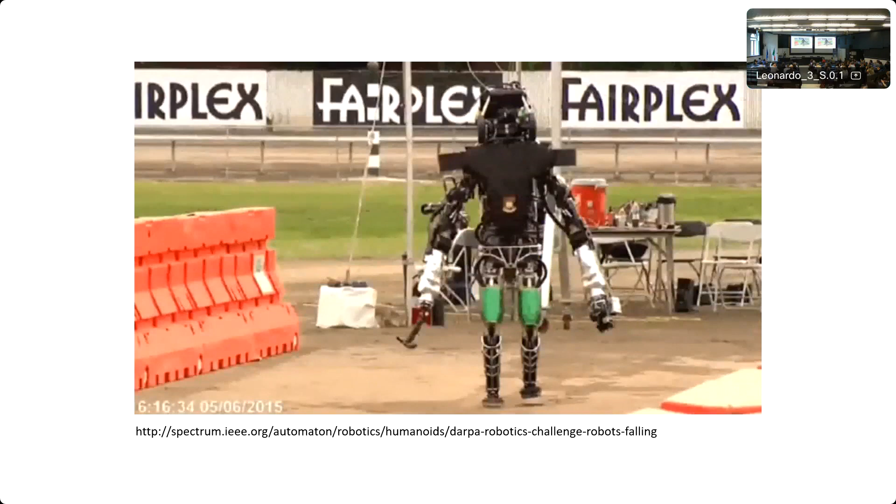But before then, I'm here, I feel like I'm representing robotics, so I must show you some videos, all right? Let me start with this. How many of you know about the DARPA Robotics Challenge? Very few, okay, not as expected. So in 2015, well the finals were in 2015, DARPA, which is a funding agency in the US, they tend to run these challenges. The most famous one would have been the DARPA Urban Challenge, which really started the autonomous vehicles boom, that was in 2008-ish. And what they did after the Fukushima reactor disaster, they came up with a new challenge: can we have a robot perform different tasks in the context of disaster relief?

So they came up with this competition that had the robot do 8 tasks: walking over sand, getting out of a vehicle, opening a door, turning a valve, picking up a drill, walking over uneven terrain, walking up steps, and I think I may have missed something, but maybe not.

So those are the competitions. There was a final event, and I was involved with one of the teams at the time. This is a compilation done by IEEE of the first day, where they compiled a whole bunch of failures. I want to show you the failures and highlight a few things to give you an idea of what we're dealing with in robotics. This is from 2015, so things have evolved since then, but the categories of failures are very similar.

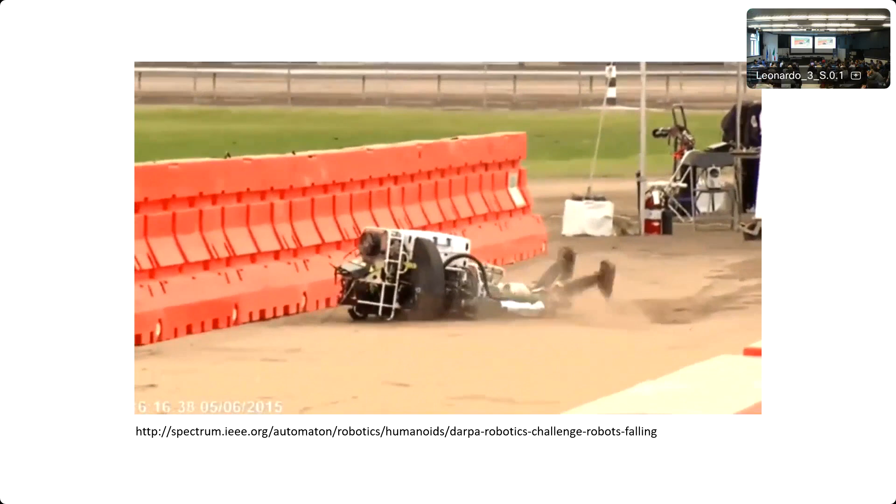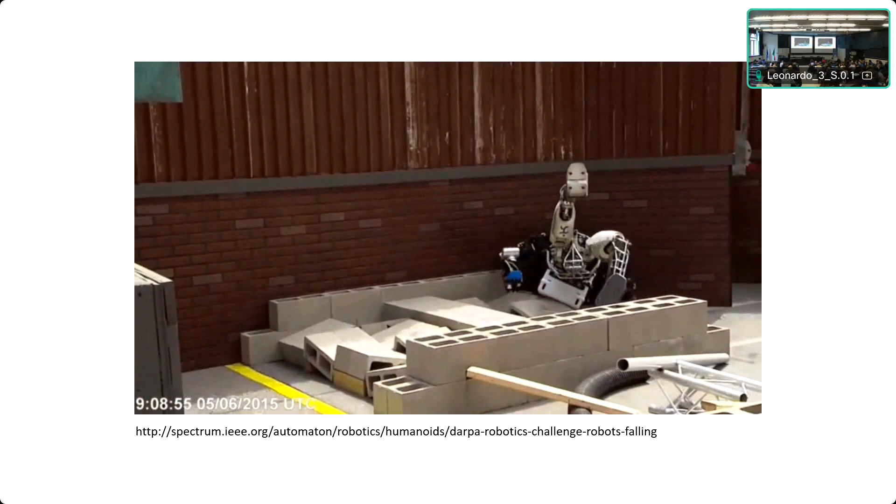So we started with walking. There are notions of stability, and notions around opening a door - maybe you opened it and maybe you didn't quite. You'll see a lot of robots falling because these are big, heavy machines that need to stabilize, and DARPA was really into humanoids at the time. So there's a bunch of things happening - walking on sand is difficult. Of course, a few people did very, very well, not my team.

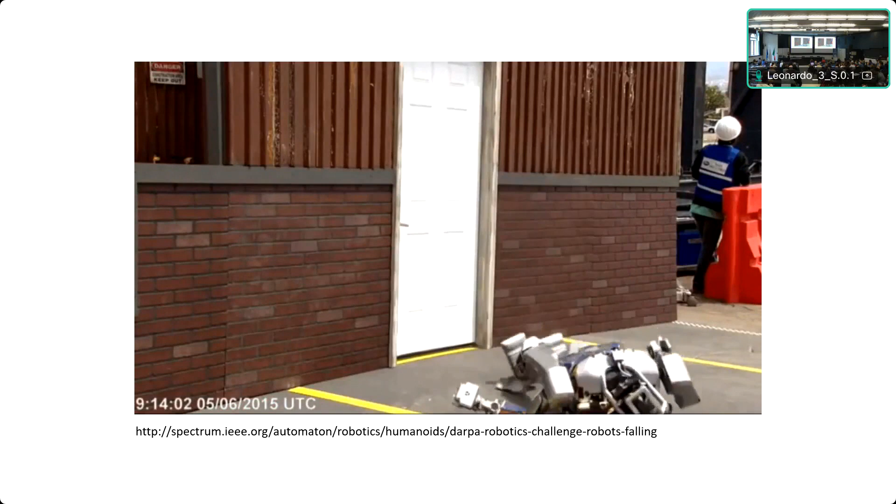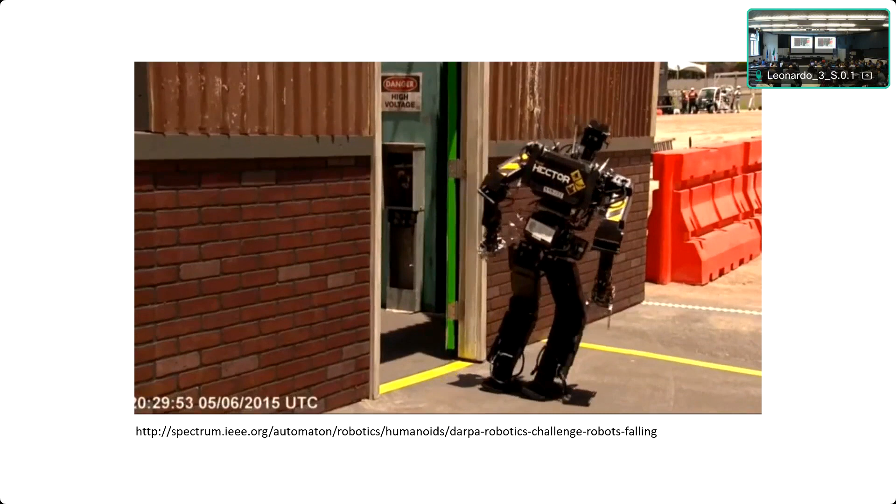Walking up steps, again, stability, heavy - center of mass and all that. But in this case there was actually a sensor failure. So it wasn't the controls, but the sensor was giving wrong information. There's some things falling.

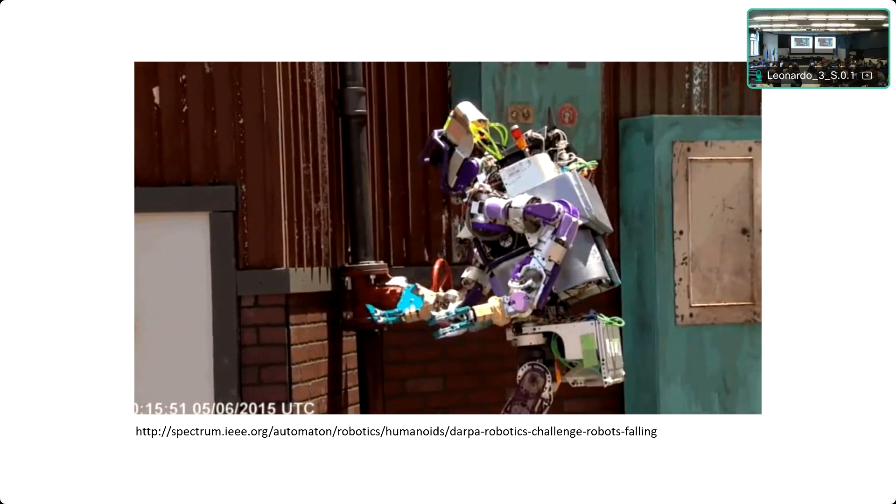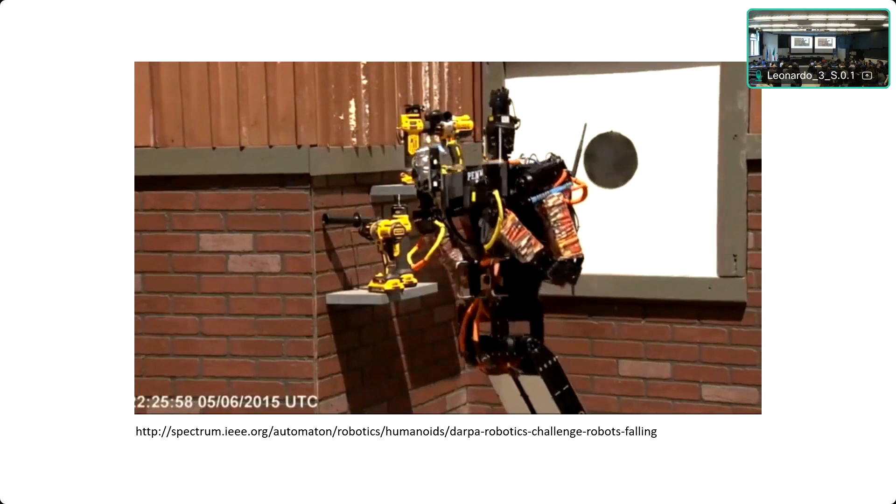This one I really like - it's trying to turn the valve. It's grasping, not the valve, and then it's turning it. Had it grasped the valve, it would have been totally fine. There's a whole bunch of other ones, things falling on them.

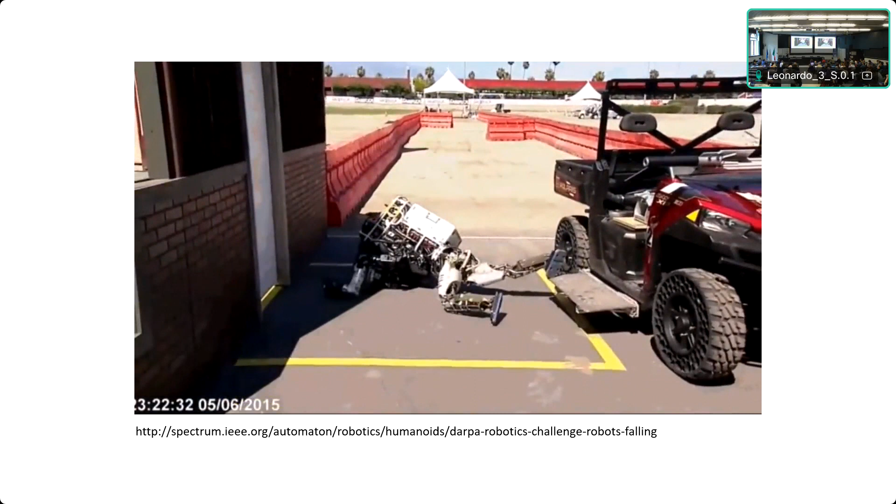This is a really nice one, I really like this one. This was human error - the mode switching was not correct. There are different modes, and what happened is, well, it doesn't really matter what was happening, but there was a mode switch done incorrectly, human error, which caused the robot to fall.

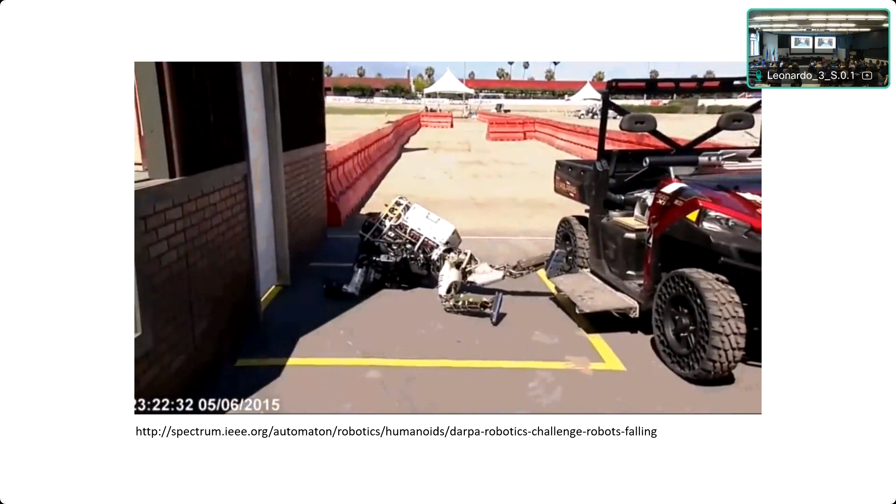But interestingly enough, this is the MIT robot, and two things were really fabulous about it. First, the task was to have the robot leave the car and step out into the yellow box, and they did get the point because the robot is fully in the yellow box. The other thing, which I think is even more amazing, is it broke the arm. All their testing, most of it, was done with the right arm for all the tasks - some tasks were bimanual, but most were unimanual.

Because of the algorithms they had - this was led by Russ Tedrake at MIT - they basically switched to the left arm and were able to complete the tasks. Well, they didn't complete the bimanual one, but they completed the rest, which was really amazing - the fact that they could switch so quickly.

So now you see, humanoids are complicated. Not all robots are humanoids - most robots are not humanoids, despite what you may see in the media these days. So what did we see here? We saw the environment - I thought I grasped the valve, I'm exerting force, I'm falling. There's stability, the control algorithms, and there's the environment - walking on sand is more difficult than walking on asphalt, and so on.

In addition, this is robots - you don't see any people. This is autonomous robots working in the real world with no people around them. What happens when you introduce people?

This is a fairly famous paper from the HRI conference, the Human Robot Interaction Conference, 2015. Researchers in Japan put a robot in a shopping mall and let it operate for a long deployment, letting people just interact with it. What you see here is kids giving the robot a really hard time - they're blocking it.

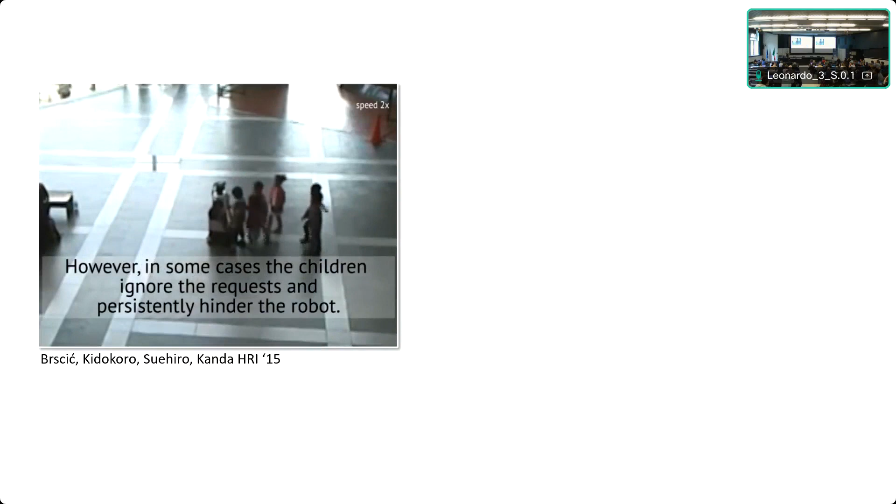They're kind of, at some point, they're kicking it. This is interaction in the wild with people, so this is robots around people, where people are not behaving well. This adds more challenges. But this is rather extreme—a good anecdote, but not typical.

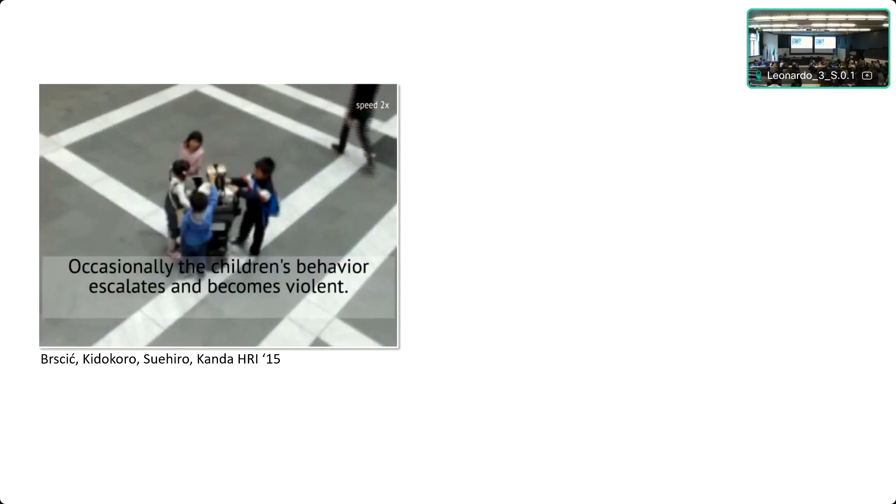What I think is more interesting is when you start putting robots to work with and around people. This is an example of work from my colleague at Cornell, Professor Bhattacharjee. He does a lot of work on assistive robotics. One example task is feeding—a robot arm with a fork going towards your face and putting the fork in your mouth. This is for people with motor impairments: spinal cord injuries, multiple sclerosis, cerebral palsy. You'll see examples of his system being deployed with actual users.

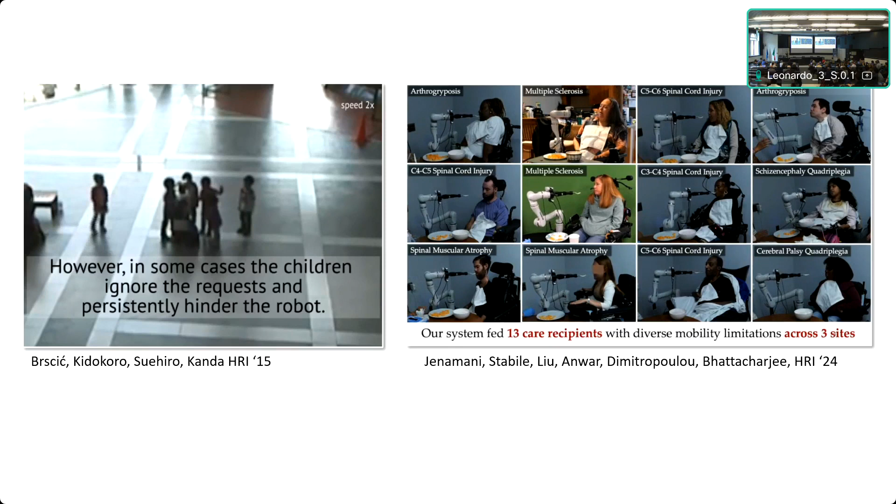So it's not adversarial. But the safety you need to show isn't just safety in the sense that you're not going to poke them in the eye, but also perceived safety. You have something coming towards your face—there are directions you want it to come, and a speed you want it to come. Even if it's guaranteed, verifiable, safe, if it's coming very quickly towards your face, you're going to flinch if you can. Not these people—some of them can't.

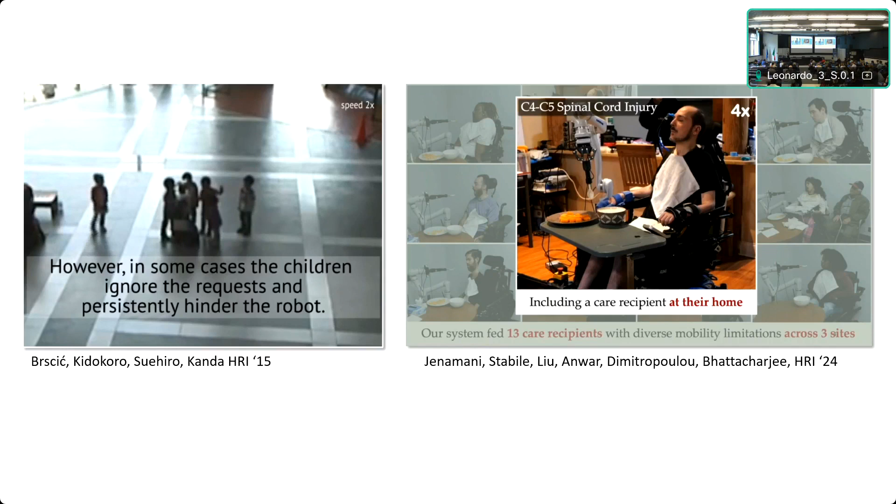This gives you an idea of the challenges with robotics and formal methods. We want to guarantee things, specify things, find beautiful mathematical formalisms to say things. But we have physical systems that are messy—different layers of code, from low-level controls to high-level behaviors. We have the environment, which may be unpredictable, and worse, I don't even know what the environment actually is, because this is all through perception, through my sensors.

Am I seeing you guys? Yes. Can I detect faces? Yes, as a person I can probably detect faces. If I put a robot here, does it recognize anything in the background? So there's the question of perception, errors, and uncertainties coming from the perception piece. And then there are people—and people, right? Yeah, say no more.

Going back to the definition of formal methods, I'd like to adjust it for my perspective—it's a very broad, concise, lovely definition. When you think about robotics, specifications require thinking about abstractions as well. I take this physical system—continuous systems with people, environment, and so on—and I need to abstract it somehow to say anything. What are these abstractions? Abstraction and specifications have to be together.

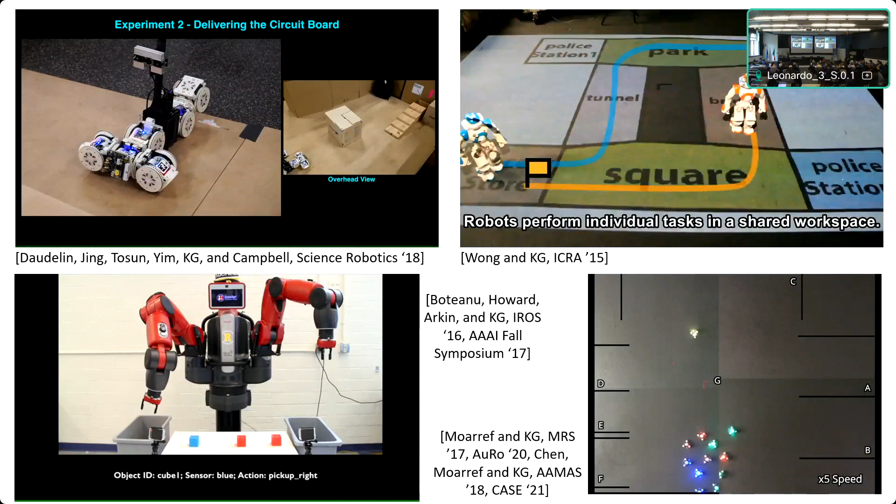These are a few systems that we synthesized over the years, all based on LTL, a lot of it with slugs, Rudiger's baby. Let me walk through them.

Top left are modular robots, built out of these modules. Each block has 4 degrees of freedom - 2 wheels, a pan so 3 rotational, and a hinge in the middle. On each face you can see half moons - those are electropermanent magnets you can turn on and off. This allows us to reconfigure the shape of the robot, and we can do this autonomously.

So our high-level behavior for modular robots had an abstraction of configurations and gaits - the shape, with a library of shapes, each with a few gaits or types of motion associated with it. We also had a perception system that abstracted the environment - stairs, a floor, and one more thing, a tall object.

We wrote specifications - let's see if it works - in this case, search for a pink tag. We simplified some of the perception for that, then drop something that's held by the magnet.

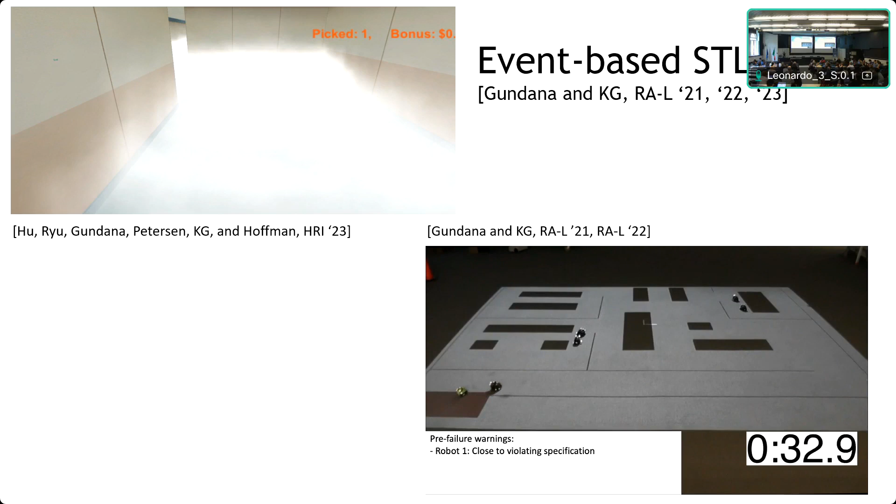You'll see a robot moving around the environment. I can't really watch it because I get motion sick, so if you get motion sickness, don't look at the top left. It's basically interacting with the person who's controlling this simulation. We had two different behaviors, and the way I sell it to my community is that to create those two different behaviors, the only difference was a few symbols in the specification. We basically synthesized this, synthesized that, and the difference was literally a few symbols. So we did that with a user study. We also did that with a multi-robot situation, which you can see—a few robots moving around. The green one, the bottom one, the lighter one, was controlled by my student. Just to show we can have multi-robot scenarios and so on. I'll come back to this to show a different point.

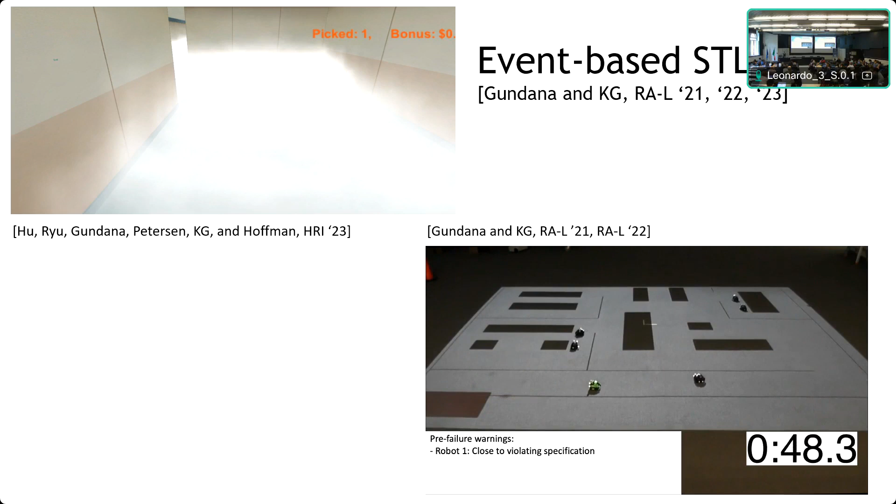The verification side, falsification, feedback, and repair - I want to give some examples of how we've been thinking about these things. I think this is very powerful, and people who used to focus on formal methods for robotics are starting to warm up to this a little bit.

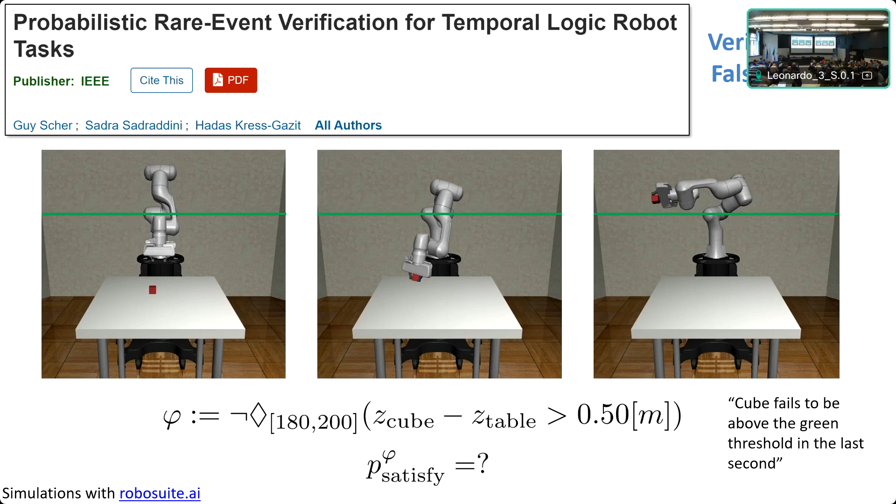What we did here, the uncertainty in this situation is the placement of the block on the table. So using reinforcement learning, we placed it a few times, gave it a reward function, and it was able to pick it up. Then we tried to see what happens with other locations on the table.

Now why is that? I don't know, it's a black box, RL, I don't know what happened. Are we always going to see this kind of separation? I'm guessing no, but it's kind of interesting to see, you can go back and simulate these things to show the system designer what's going on there, and maybe put additional examples and so on. So this is kind of from the falsification.

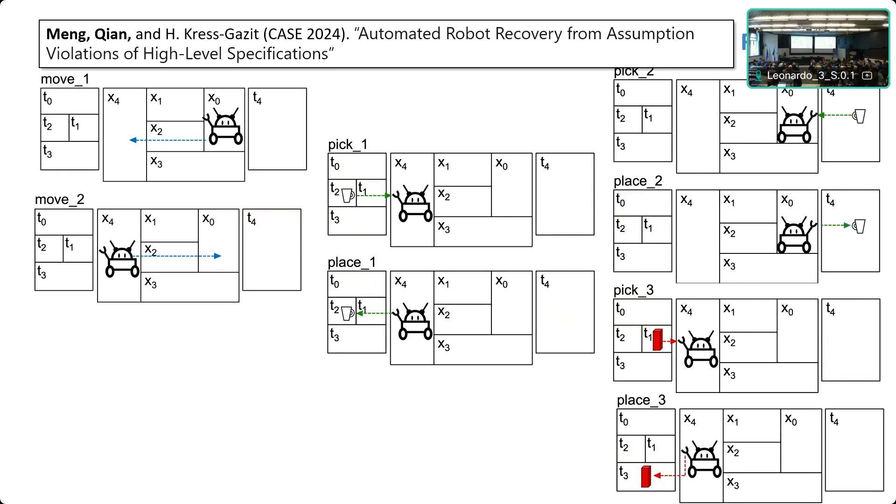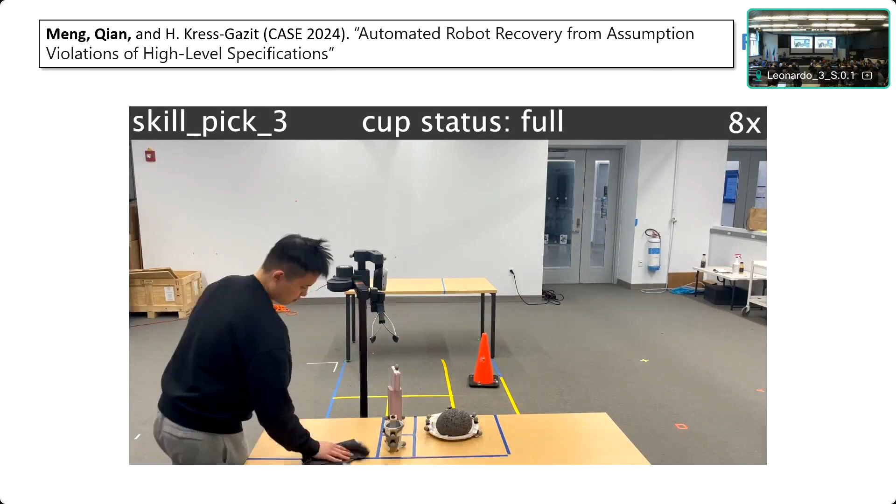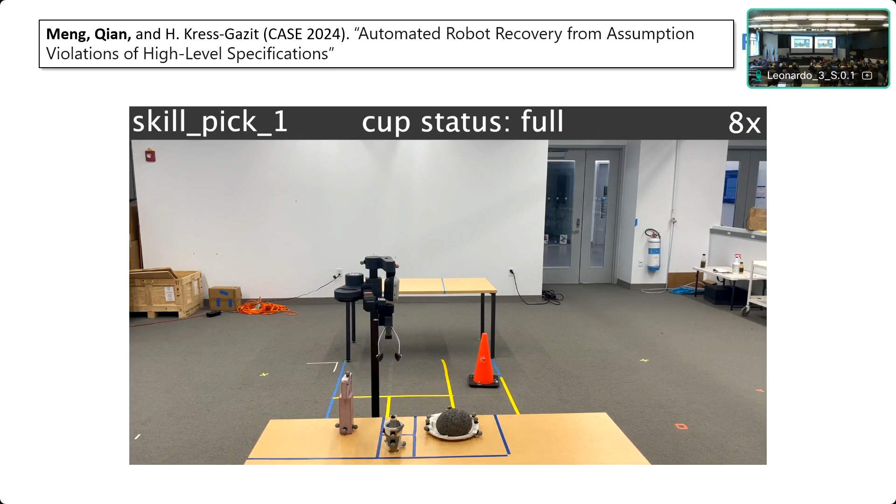In this context, we have a bunch of skills: the robot can move, pick up an item, drop an item, but it's making some assumptions. What you're going to see here is that these assumptions are violated. For example, it was supposed to move that pink object to the right, but now there's an object there, so it had to recreate a skill that puts it to the left.

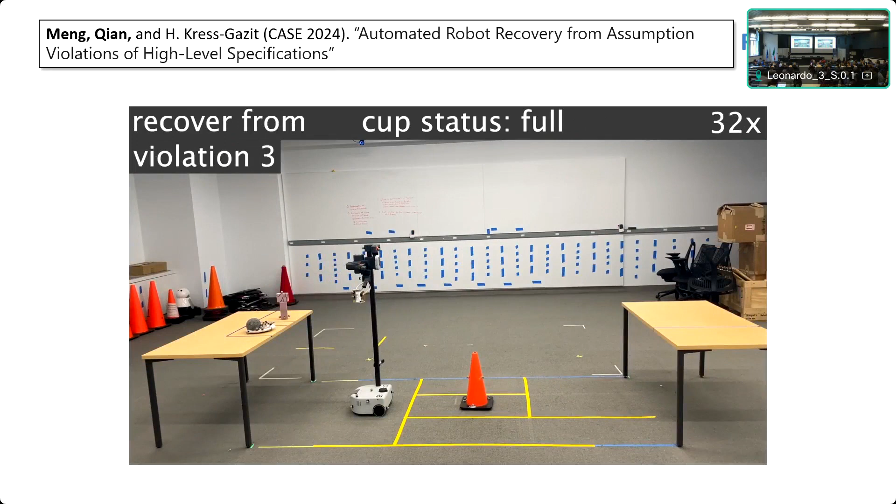Basically what we're looking at is 3 skill violations. I'm starting to execute a skill, and its preconditions, the assumptions it's making, get violated — that cone was not supposed to be there. So it's resynthesizing, creating a new skill that allows it to complete the task. The idea again is finding missing skills, both from the symbolic perspective to fix the task, and from the physical perspective to actually implement it.

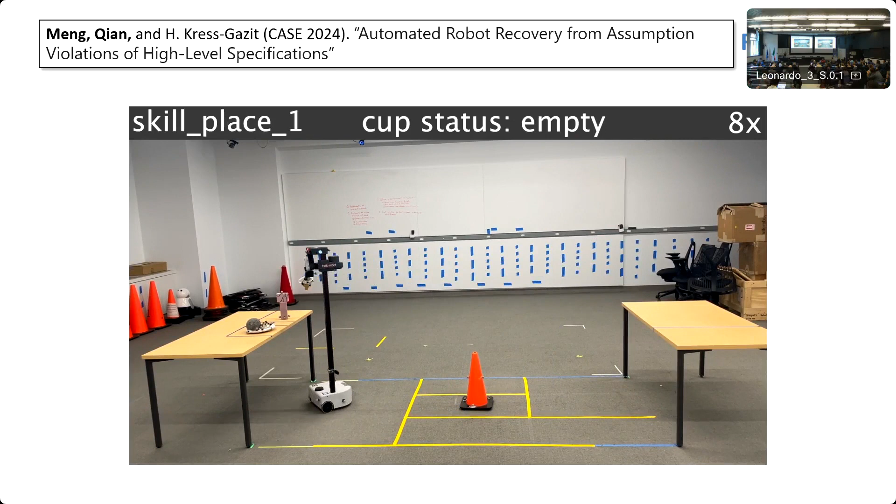This is kind of, I'll keep Hadas' definition of formal methods in the context of robotics — it doesn't fully capture it, but I just want to highlight a few things. I want to end with a few exciting directions in my mind, slightly biased. I'm going to talk about two things that are showing up now, and I had some of these conversations at this conference.

The first one is robot learning and formal methods. Marta gave a talk about verification of neural networks — you can think about verification of a neural network as its own question. Then there's the question of a system that has learning in it, be it perception or action, and how do I start thinking about verification? Can I do verification? Probably not, but falsification, synthesis, and all these questions on the full system — because I really care about the full system and what it can do.

So, as I mentioned, a few other plugs for the annual reviews. These are things that the community, from the robotics perspective, or even the hybrid systems community going and implementing these things in robotics - you'll see a lot of the word safety. Safety typically means you have a set of states that are unsafe, and can you guarantee it? So there's shielding, safety filter or safety shield. There's safe learning, so limiting the actions in an RL setting, reinforcement learning setting, and so on.

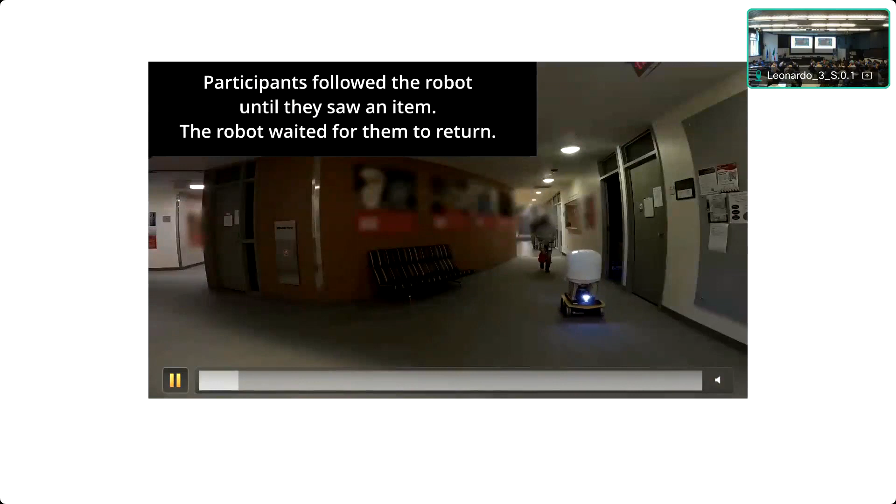So the robot is controlled using event-based STL, fully autonomous, and so on. We have two different behaviors. They're HRI questions, which I'm not going to go into. But what I do want to go into is something interesting.

Let's see if I can do that. Oh. It's not letting me skip ahead. Interesting. Oh. All right, I'm going to run this and yeah, I still have a few minutes.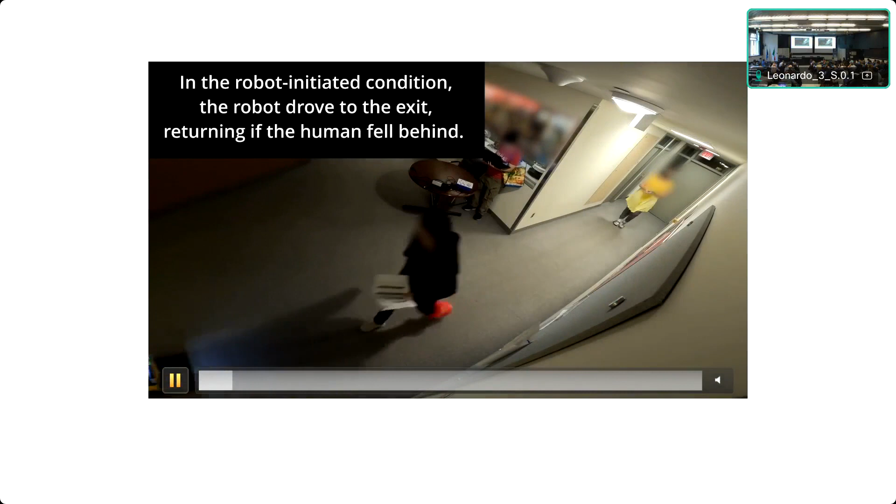So it's going to have two different behaviors. One of them, the robot is initiating an evacuation - it's trying to be proactive. The other behavior you'll see in a second is the robot following the person, who decides when to exit, and then they exit. It's a little more complicated than that, but that's the idea.

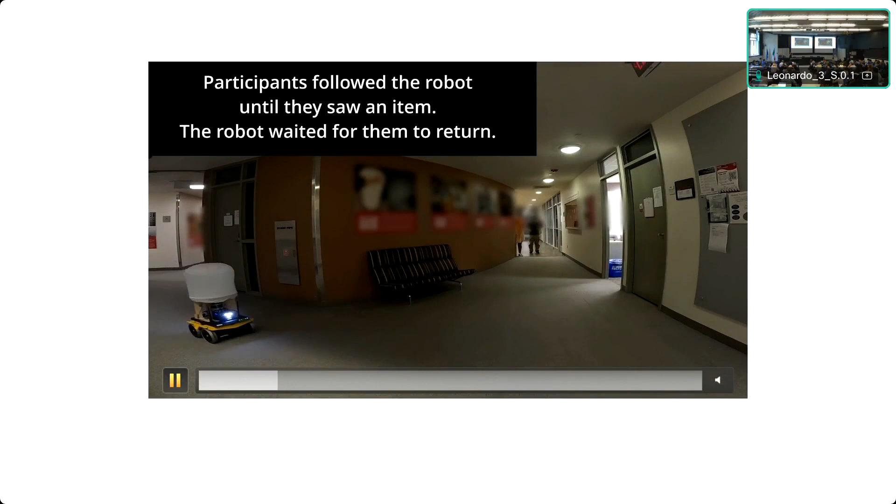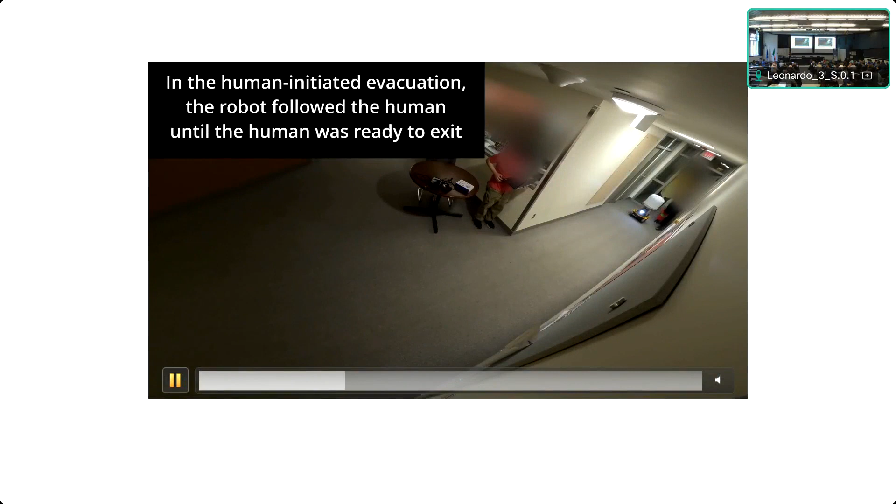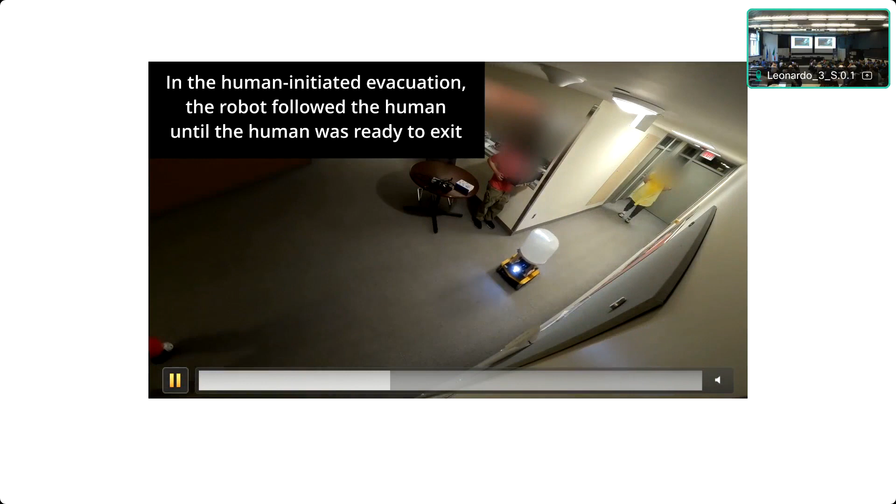Again, fully autonomous. The way we're doing this, the robot has a laser rangefinder - we map the environment with it, and it does localization. It's detecting the person using a camera and a wireless sensor. You can see we made the camera's job easier by putting this kind of leg warmer on the person - it's red with a green stripe, very easy for vision algorithms to detect.

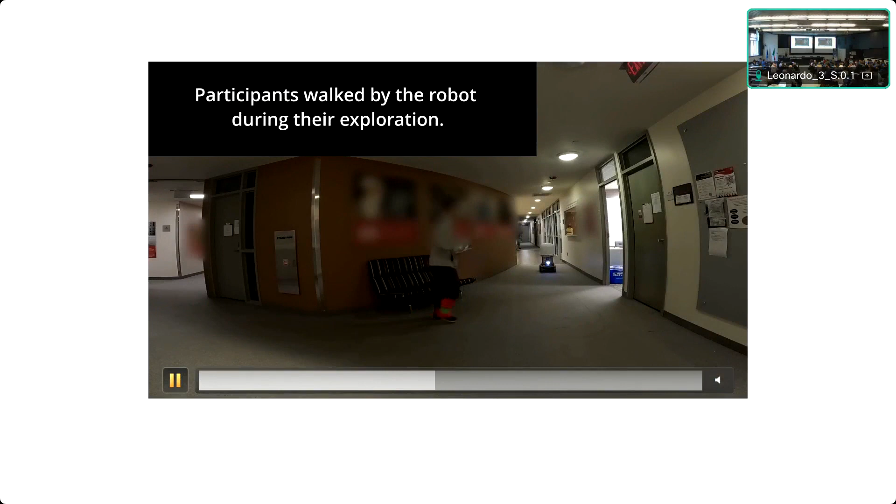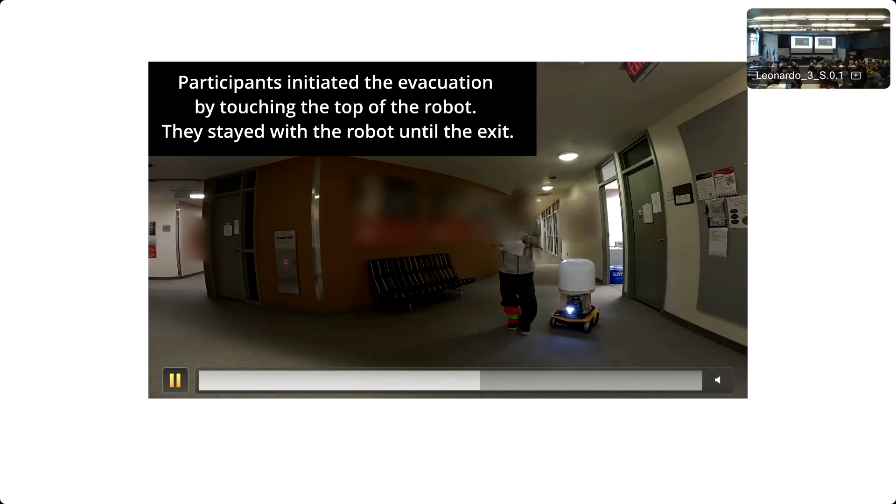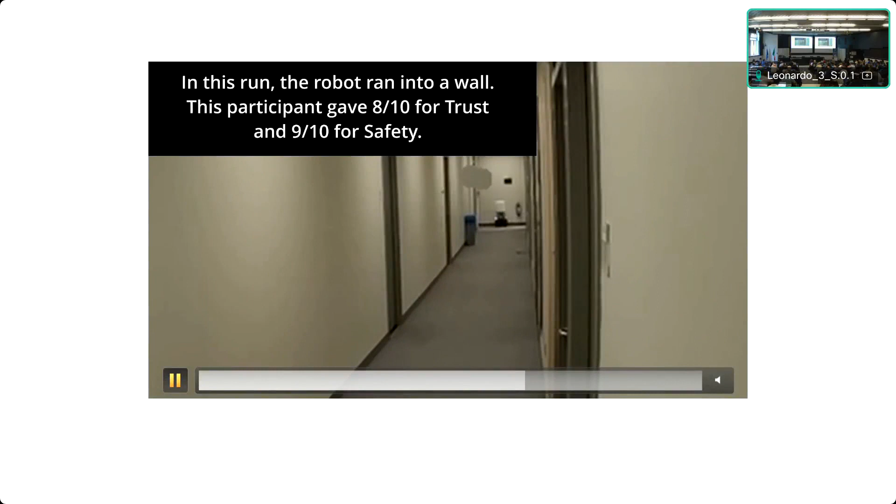But what you'll see in a second, which I found very interesting, is the notion of safety. When you run an autonomous robot in an environment without motion capture, they fail - typically localization just gets messed up. So you'll see in a second that localization messes up, so the robot thinks it knows where it is, but it's not quite correct in its assumption. And then you'll see at the end, it basically bumps into the wall and falls down.

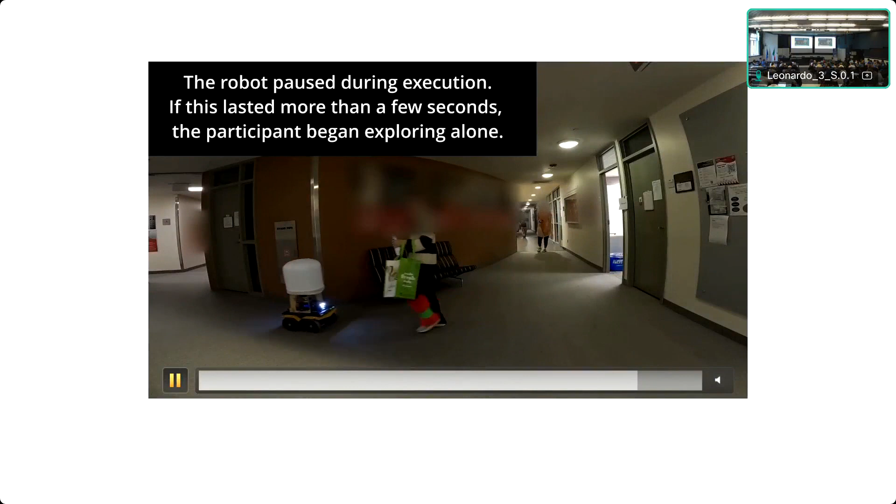Now, the interesting thing here is that participant actually gave the robot 9 out of 10 for safety and 8 out of 10 for trust. So there's something going on there in terms of the interaction itself. Even though it's not safe - I mean, it ran into the wall, running into the wall is not safe - but it didn't affect the person in a way that made them distrust the robot.

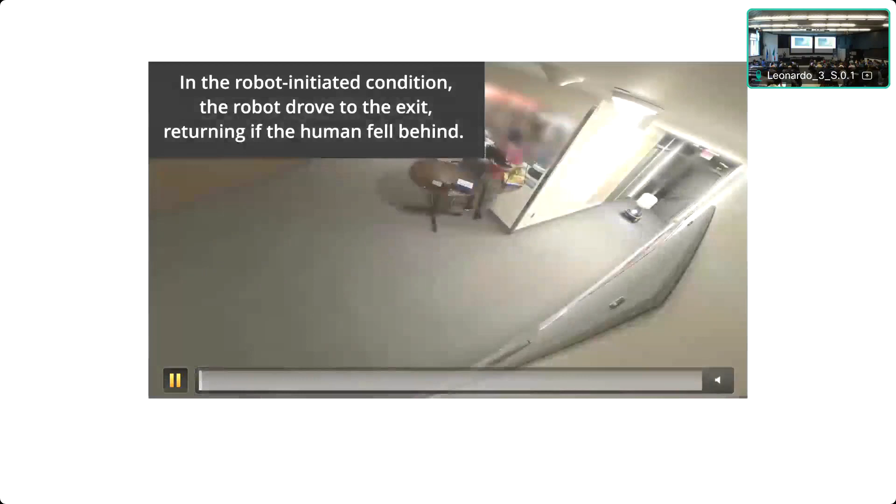So the point I'm trying to make here is that when you think about HRI, safety of the robot and safety in terms of the interaction is not the same thing. I can pick up this adapter, and if I drop it a few times - or imagine I'm a robot trying to put this on the table.

I'm dropping it a few times, but then I pick it up and leave it here. It's failing, but it's kind of doing the right thing. You're kind of like, okay, that looks okay. On the other hand, if I pick it up, and every once in a while I just decide to put it here, you'd be like, what's going on? That would be something broke in the interaction. Both of them are failures, but one of them is going to be more detrimental.

So the questions that are coming up in the context of HRI, formal methods and HRI, are how do I specify interaction? Not safety of the robot - I'm not going to run into a wall. But what is it that enables me to have a seamless interaction even under some robot failures? And robots will fail. There's no going around that.

The other two are kind of interesting things from the human perspective. People adapt to technology, so how do we model that from the formal methods perspective? The fact that a person, as they gain more knowledge of the system, will actually help the system or change their behavior. So we can't assume that a person is fixed, or the model of a person is fixed. And modeling of people is difficult, and we can go on a whole long tangent around that, but we will need a model if we want to do any synthesis and so on.